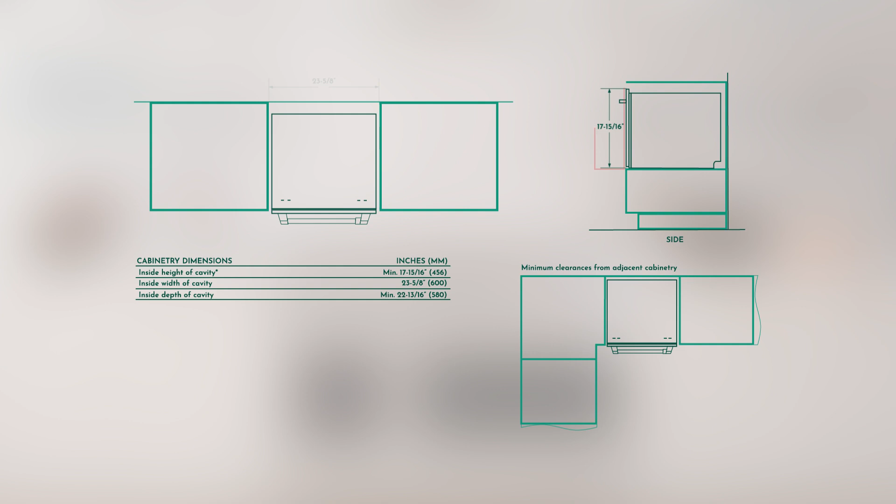As the first step, determine the location and identify the clearance specifications. The dishwasher drawer fits into a standard depth and width cavity. The inside height of the cavity must be a minimum of 17 and 15/16 inches, inside width 23 and 5/8 inches, and inside depth a minimum of 22 and 13/16 inches.

A minimum clearance of half an inch is required from a corner cabinet to the unit, and a minimum clearance of 1/16 inch to the adjacent cabinet door is required.

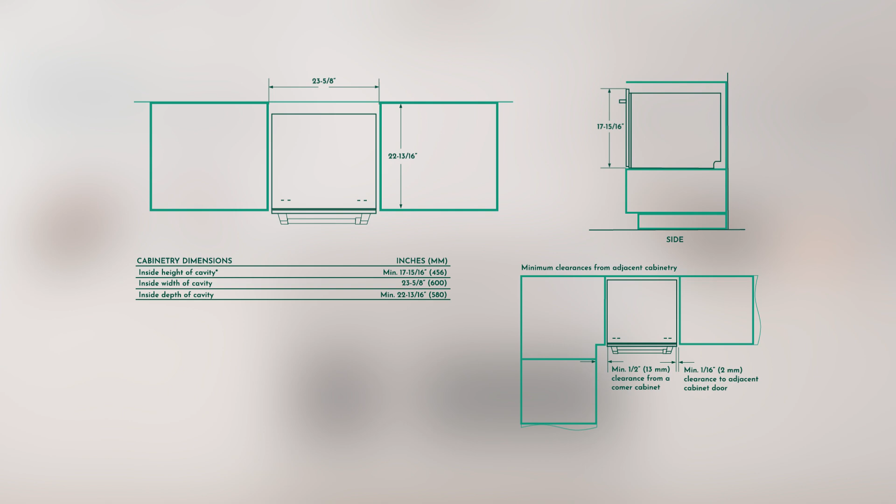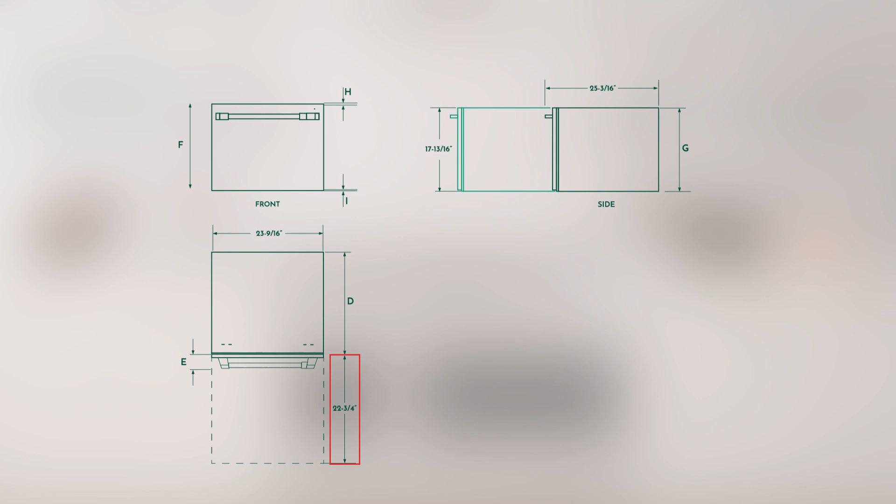If the sink is on the left of the dishwasher, the drain hose can extend up to 78.5 inches, the inlet hose can extend up to 64 and 3/4 inches, and the power cord up to 78.5 inches.

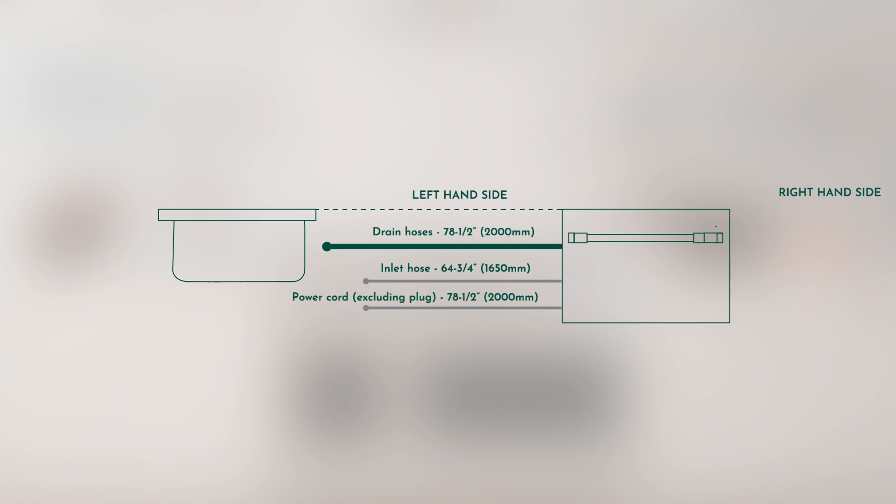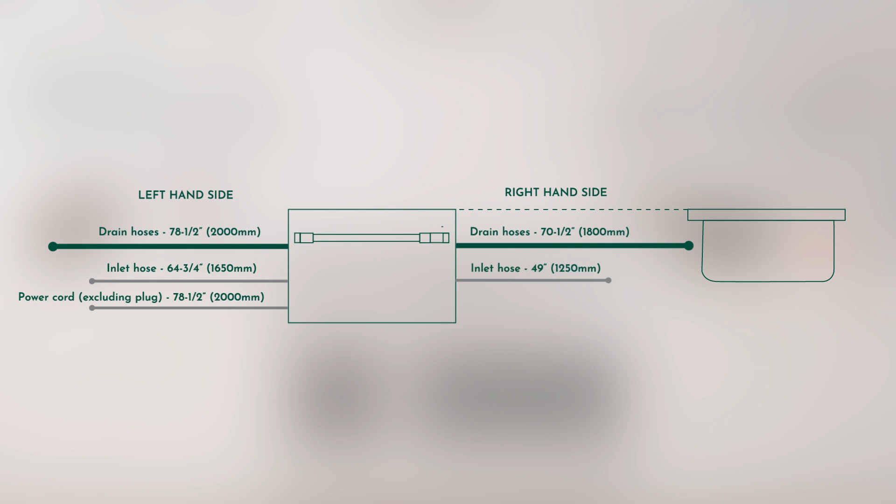If the sink is on the right of the dishwasher, the drain hose length can extend up to 70.5 inches, the inlet hose can extend up to 49 inches, and the power cord up to 78.5 inches. Do not shorten the inlet hose; use the entire length.

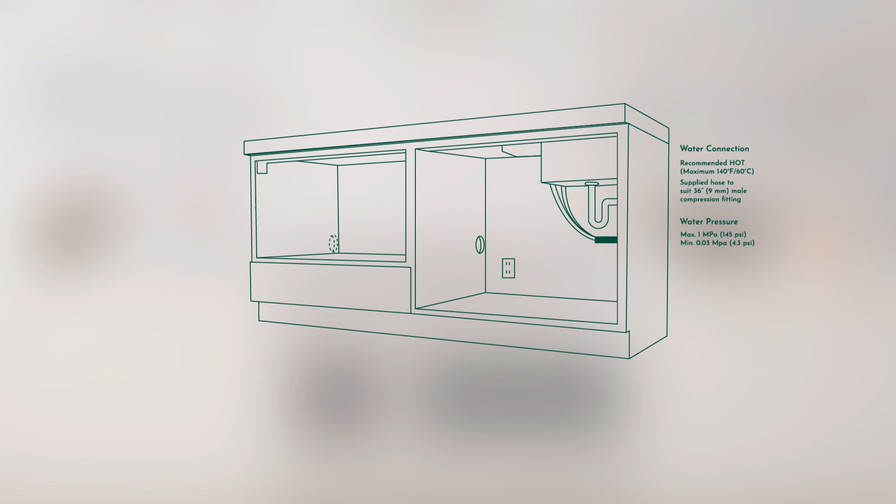Service holes can be located either side of the dishwasher, close to the rear face and the floor, for access to the water supply, drain, and power outlet. The service holes for the hose and the power cord is to be 1.5 inches maximum. To prevent hose kinks, the hole edges must be at a maximum distance of 1/2 inch from the floor and 1/4 inch from the rear inner edge.

The power outlet must be in a cabinet adjacent to the dishwasher cavity. Refer to the installation manual if a power outlet is not available.

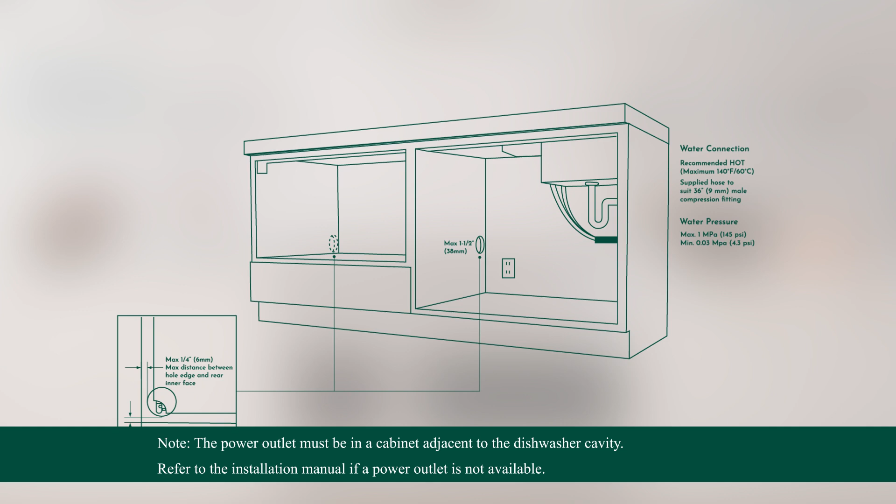Remove packing foam from the top and the front of the unit. Then place the unit on its back and remove the packing from the bottom. Straighten the unit and place it in front of the cavity. Note that there is a protective material on the front of the unit that should not be removed until the unit is installed.

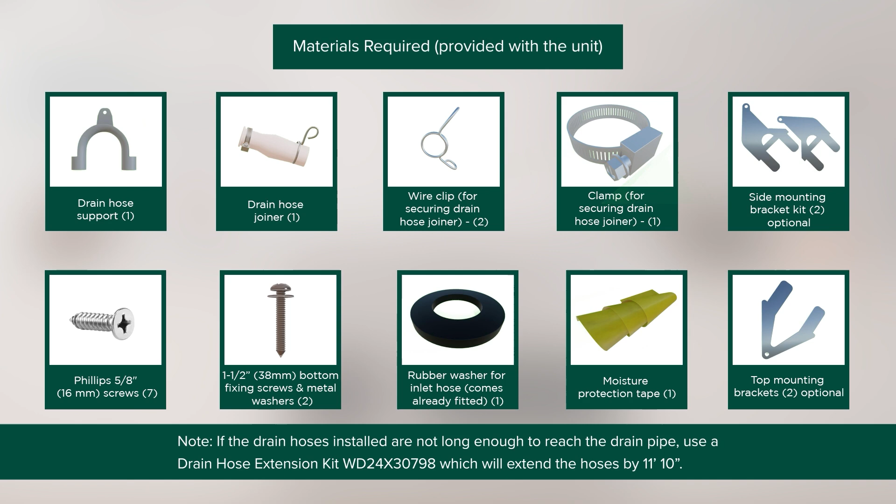Note, this section is not required if you intend to plug in your unit with the power cord. If you are using a power cord, skip ahead to the next section, Installation Preparation and Planning.

To hardwire the dishwasher drawer, you first need to remove the dishwasher drawer. Before you remove it, place a tall box near the installation site to rest the drawer on it after it is removed. Pull the dishwasher drawer out until it stops.

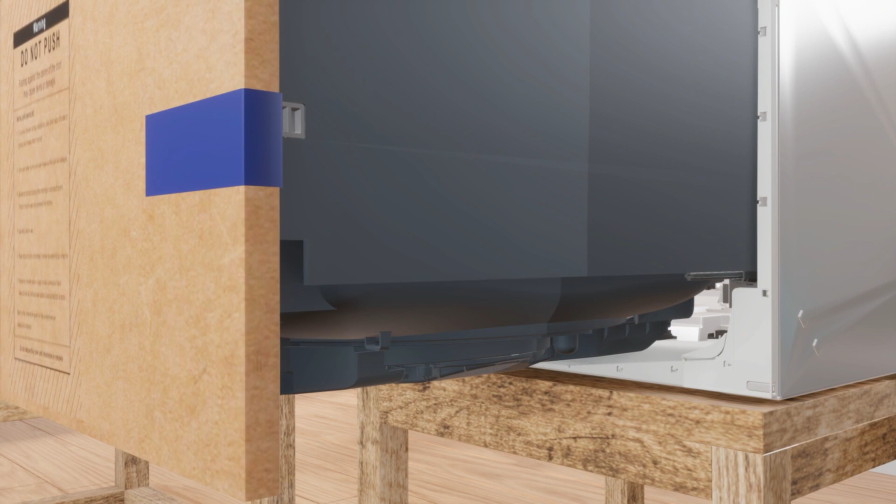Press the release tabs on both sides and press them back to release the drawer from its runners. Lift the drawer from its position and place it upright on the tall box. Push the drawer runners back on both sides.

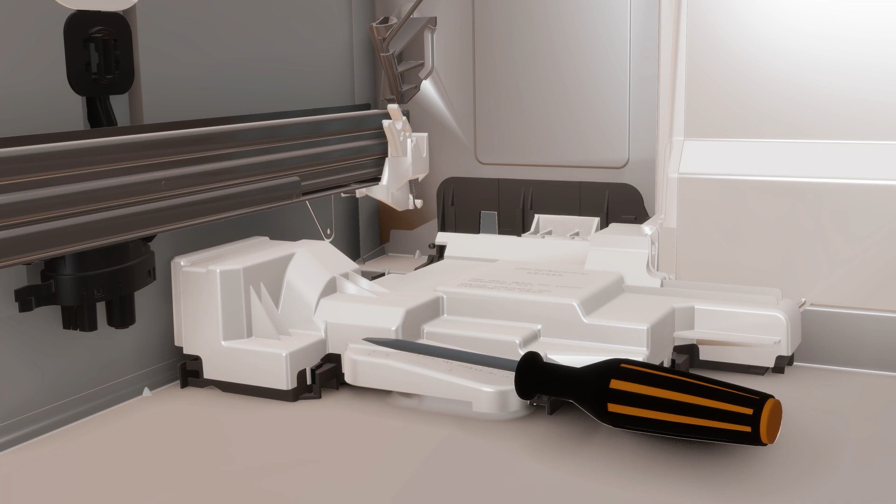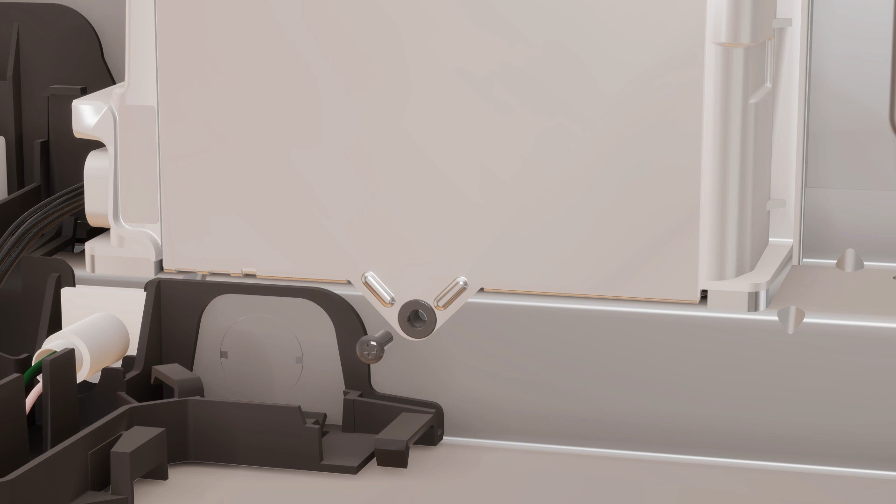To hardwire the dishwasher drawer, perform the following steps. With a flat-bladed screwdriver, push in the clips and slide out the access cover. Also, unscrew the electronics module cover. Carefully pull out the electronics module and place it on the chassis base out of the way.

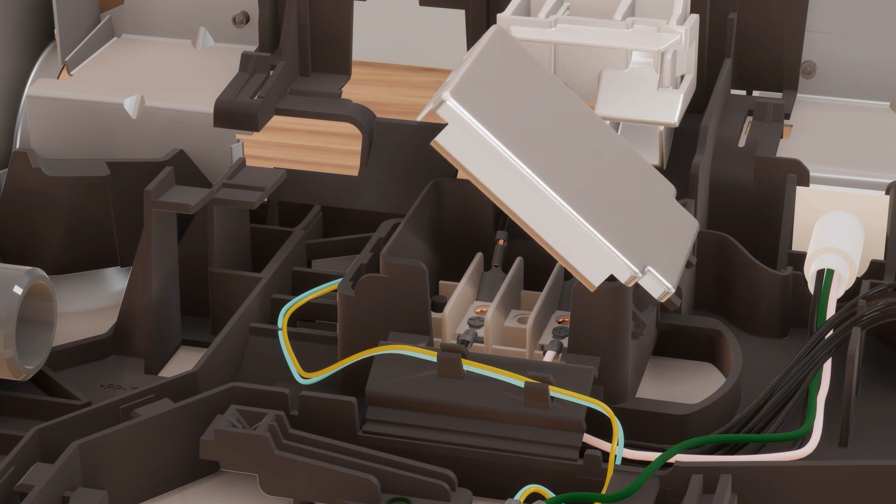With a screwdriver, unclip the plastic harness cover and hinge open. Slide the terminal block cover sideways to unlock and hinge open to access the terminal block. Loosen the black, white, and green wires as shown.

Note: only unscrew the black and white terminals 2 turns. They are fork terminals and do not require the screws to be removed. The ground requires the screw be removed; it is a ring terminal. Remove the center ground screw.

Locate the power cord on the rear of the unit. Cut the power cord off flush to the strain relief, and from the inside, pull the remaining wires from the strain relief. Remove the strain relief. Remove the metal knockout from the back of the unit using a screwdriver. Fit a suitable cable clamp for the conduit through the metal knockout.

Ensure that wiring is routed through or under housing ribs. Screw the black, white, and green wires correctly.

Ensure that both the fork terminals are replaced and the bare ground wire is clamped. Push the plastic harness cover back and ensure that it is clipped back into place. Pull down and slide back the terminal block cover.

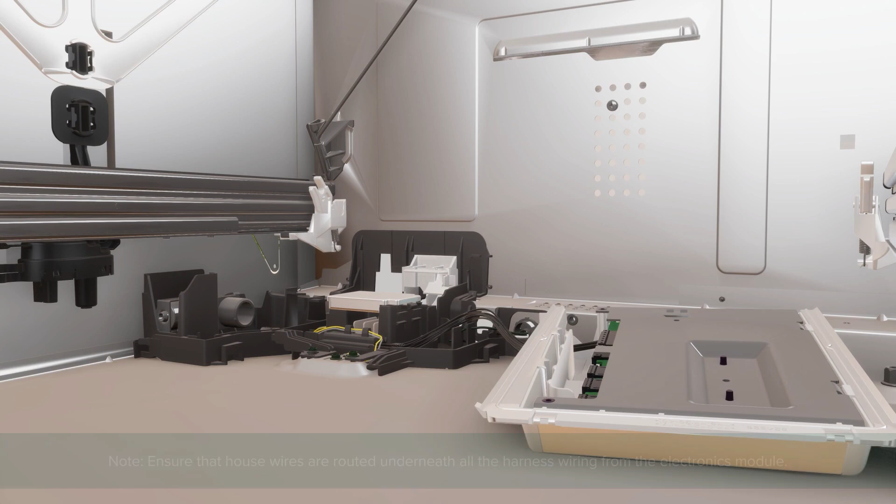Ensure that house wires are routed underneath all the harness wiring from the electronics module. Refit the electronics module back into place and replace the screws securing it. Slide the access cover back, ensuring that the 2 clips are fully locked in place.

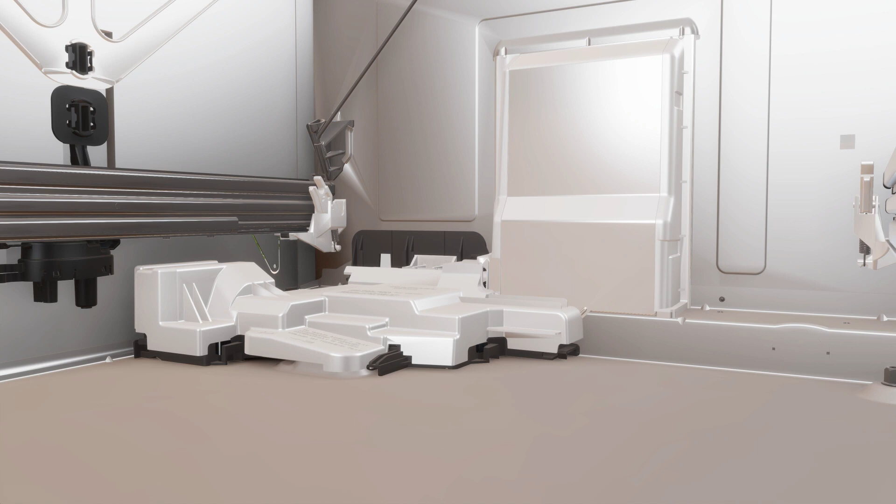To refit the drawers onto the runners, place the drawer back on the drawer runners by lifting it or rotating it counterclockwise. Slip your finger under the slide and pull the release tabs forward until they snap into place. Ensure that the tabs are fully pulled forward and locked into place.

You can secure the unit without removing the dish drawer, method A, or by removing the dish drawer, method B. Note that method B is the recommended method to secure the unit. If you use method A, pre-drill screw holes in the front face of the cabinet. This step is not required for method B.

Let's look at the process of securing the unit using method A. There are 6 mounting points built into the chassis. If you are unable to use those mounting locations, then attach the 4 side mounting brackets at the front. Attach them into their slots using a flat-headed screwdriver. Ensure that they are properly attached before sliding the unit into the cavity.

Bend the tabs on the brackets by 10 to 15 degrees for easy assembling of the brackets into the slots. The mounting brackets are in pairs and must be attached on diagonally opposite sides. Bracket A must match slot A and bracket B must match slot B.

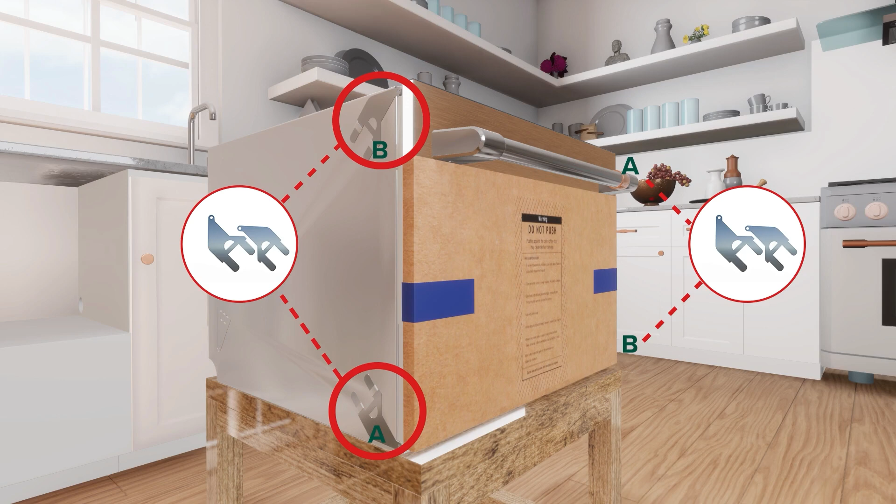While pushing the unit into the cavity, ensure that the ends are not pushed into the chassis. Before you push the unit into the cavity, tie the hoses together using tape for ease of passing them through the service hole. Verify that the bottom of the cavity is leveled and then push the unit into the cavity. Do not use excessive force, as this may pinch the hoses.

As you push the unit into the cavity, pull through the hoses and cord, ensuring that they don't get twisted or kinked. To center the unit in the cavity, use the spacers included in the package. Refer to the spacer installation instructions for complete details.

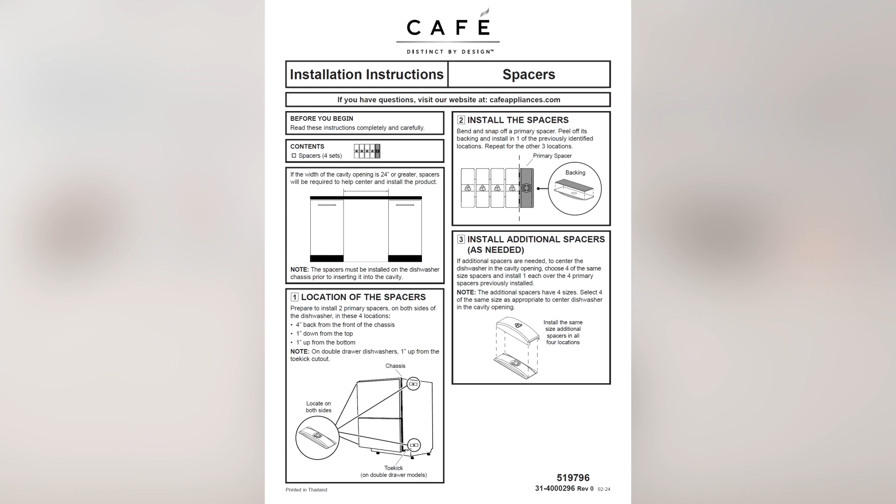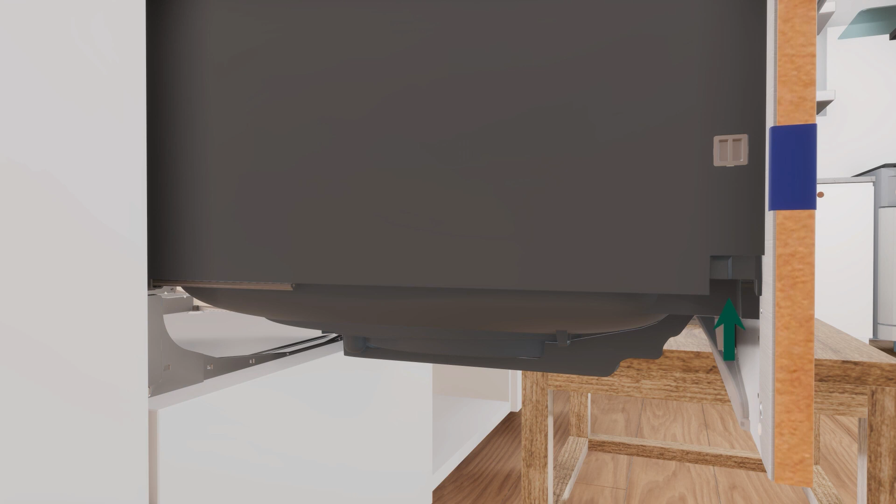To secure the unit by removing the dishwasher drawer, method B: as a precautionary step, place a box near the installation site to rest the drawer on after it is removed. Pull the dishwasher drawer out until it stops. Then press the release tabs on either side and push back to release the drawer from the runners. Lift the drawer off its runners and place it upright on the tall box.

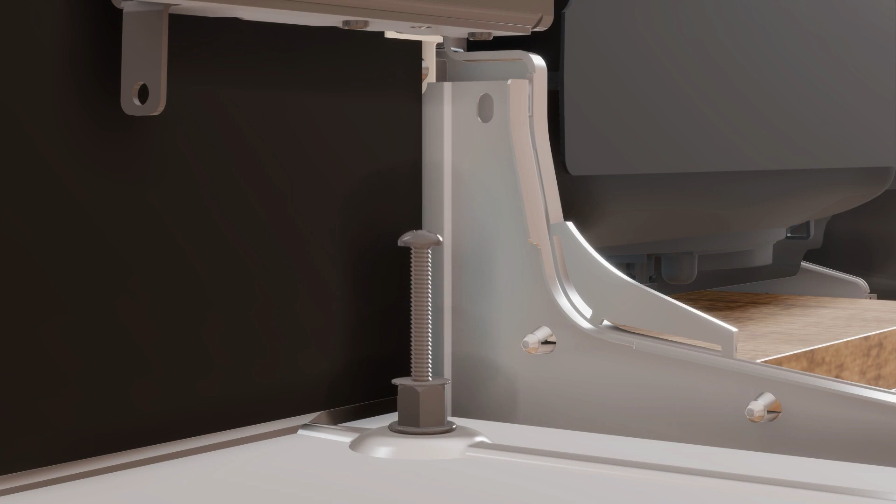This will help to prevent kinked hoses. Push the drawer runners back on either side. The unit has a pair of mounting brackets at the bottom. Use 1.5-inch screws and washers for the bottom mounting brackets.

If the bottom mounting brackets are not available, you can use the side mounting brackets that are on either side of the chassis. Before you screw the side mounting brackets, pull the insulation from the back inside corner. Use 5/8-inch screws for side mounting if there is cabinet material to screw into. Ensure that the insulation is repositioned correctly.

Before you refit the drawer onto the runners, make sure the hoses are not twisted and the latches at the rear of the drawer runners are facing forward.

To refit the drawer onto the runners, place the drawer back on the drawer runners by lifting it or rotating it counterclockwise. Slip your finger under the slide and pull the release tabs forward until they snap into place. Ensure that the tabs are fully pulled forward and locked into place. Remove the protective material in the front of the unit.

Next, let's look at the plumbing and drainage options. For dishwashers using air gap with drain hose joiner, use a commercially available air gap kit. When installing 2 single drawers, this provides separate draining for each drawer and eliminates cross-draining problems. Secure the drain hose to an air gap.

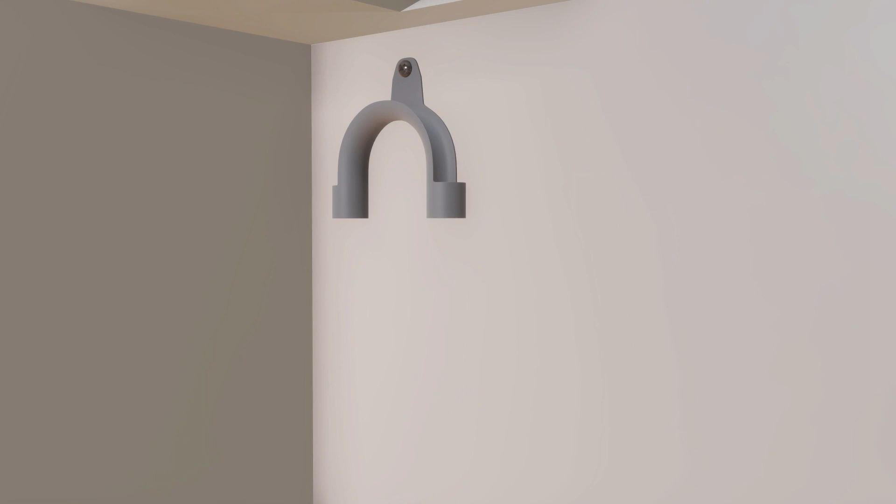The maximum height to the top of the air gap is 37 3/8 inch. For dishwashers using drain hose joiner onto sink trap or waste tee, screw the drain hose support through the high loop to the back wall at a suitable height between 29.5 inches and 34 3/4 inches from the floor.

Push hose through the drain hose support to required height if space is limited. Ensure the drain hose is routed straight to the joiner so that wastewater does not accumulate in the hose. Remove excess drain hose material if necessary. Do not shorten the inlet hose.

Now connect the inlet hose to the hot water supply. Ensure the supplied rubber washer is fitted inside the coupling. Tighten the coupling using a wrench to prevent leaks. Ensure that the dishwasher is powered off before turning on the water.

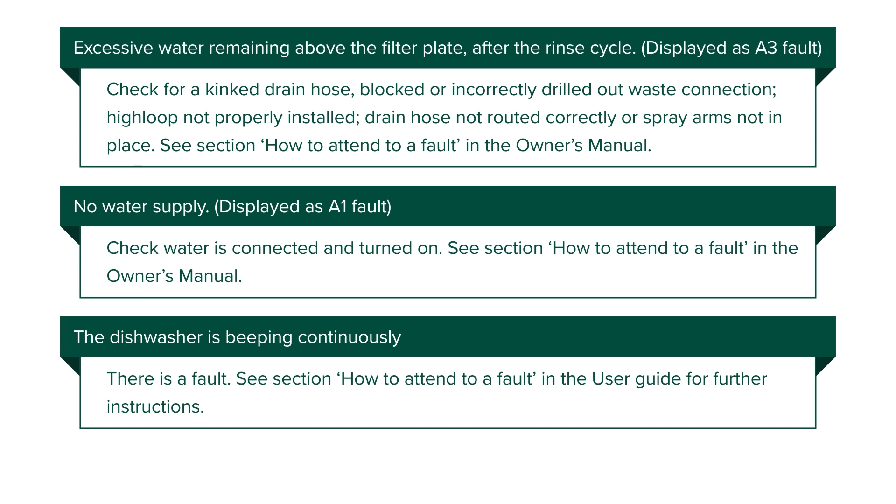Displayed on screen are some basic troubleshooting techniques. For further assistance, please refer to the owner's manual for warranty details and your nearest authorized service center, or contact us through our website.

The post-installation checklist is displayed on the screen. This checklist allows you to check whether the installation has completed successfully.

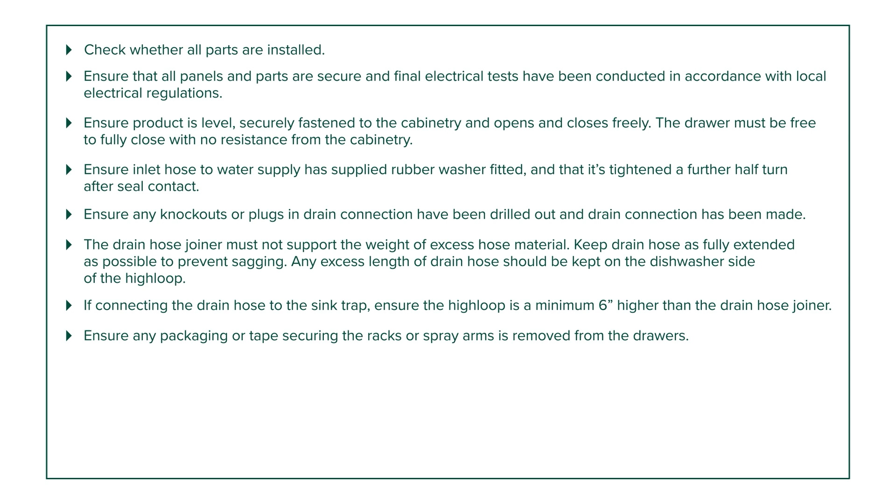Connect your unit using the Smart HQ app to ensure you receive notifications and software updates. The installation is now complete.